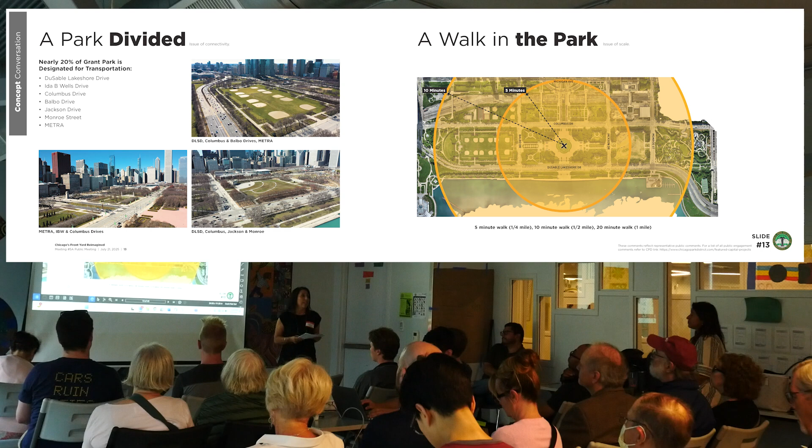We also heard that as a big park, it is hard to get around, especially because it is difficult to cross intersections when there's a lot of traffic.

Although the diagram shows a 5-minute walk in the smaller circle and a 10-minute walk in the larger circle, the reality is when you're walking along the sidewalk, crossing the street, crossing multiple lanes, it takes a lot longer than 5 or 10 minutes to traverse the park. So it is a lot to ask for people to come from north to south. It is a long way.

We also understand that there's conflict between traffic and pedestrians. So aligned with CDOT's Vision Zero, we are interested in having zero conflicts between traffic and people. Maria, these are the root issues that ended up being at the heart of many of our proposals addressing connectivity and scale, and how to facilitate pleasurable movement throughout the park. Dom and I will be taking turns presenting the ideas to you. Thank you, Dom, for jumping in.

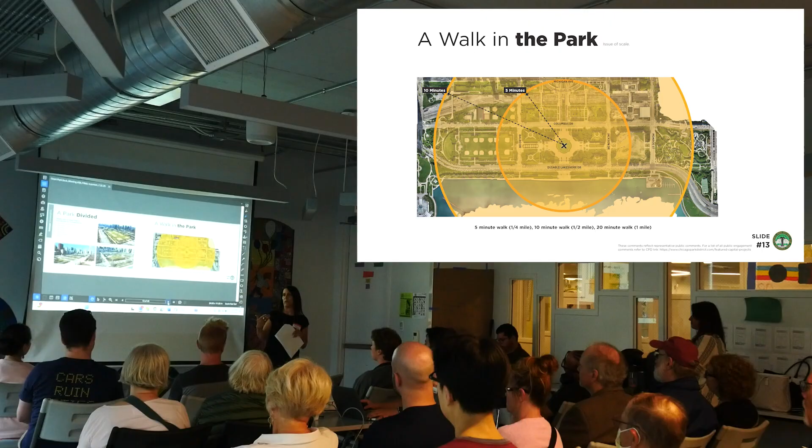The input that we gathered from you helped us develop 2 ideas, 2 concepts. You'll see them here on the left: stitching and bridging, and ultimately the thought of combined solutions between stitching and bridging. I'll tell you what those concepts really mean.

Stitching recognizes the divided park by transportation and accepts it, determines okay, there's going to be traffic and streets in the park, how do we make those better? Is there a way to narrow lanes? Is there a road diet solution to help minimize the traffic lanes or slow down the traffic? So stitching is about recognizing what's there and improving it.

Bridging is about going beyond that and separating people from traffic as much as possible. So whether it's having pedestrians go above traffic, having cars go below pedestrians, or some other way, we are looking for ways to physically separate pedestrians and traffic, which is one of the biggest concerns we've heard over the years of engagement. Ultimately, we think the solution would be somewhere in between. Some areas will benefit from the stitching concept and some from the bridging concept. You'll see comments or ideas for both of those concepts through this presentation today.

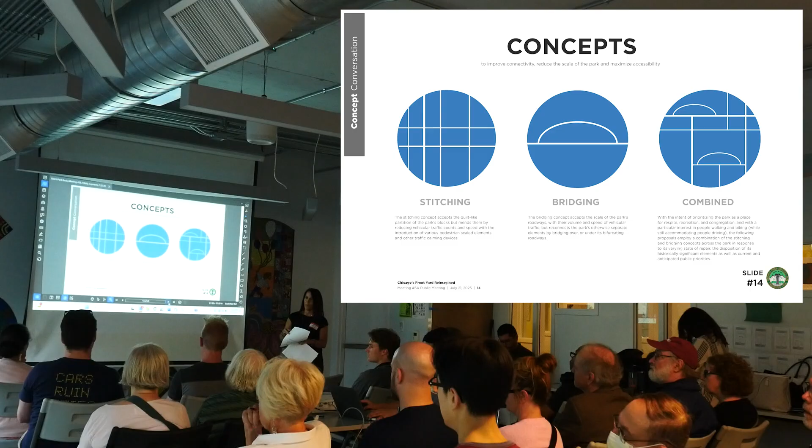As mentioned, this is a really large park, 300 plus acres. So in order for us to organize this presentation and talk through the ideas in a logical way, we have divided the park into 5 sections, like 5 chapters of this presentation. The first chapter is the Parkwide Elements, elements that will happen throughout the park. They're not specific to any area, but they affect the entire park.

Most of them are related to transportation, whether it's road diets, water taxi access, METRA lines, or what to do with Columbus Drive, how to make that a better street.

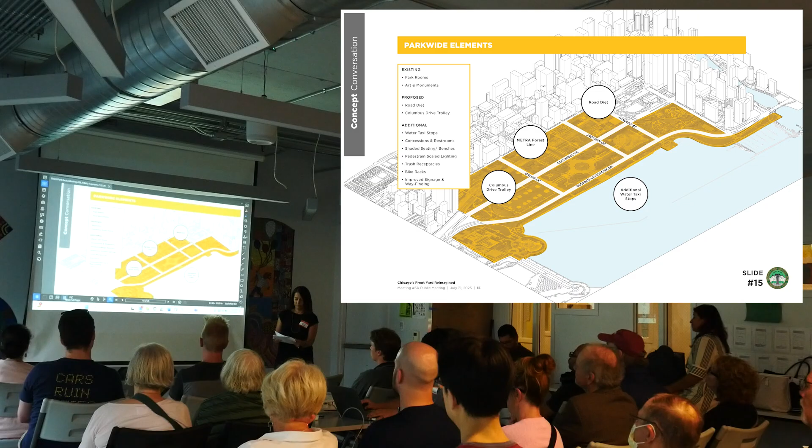Starting with DuSable Lakeshore Drive, one of the most important prominent roads on the park. The stitching concept proposes improvements to DuSable Lakeshore Drive. In this proposal, we are not reducing the number of lanes, but we are proposing to narrow the lanes in order to make room for a planter area, which is an area of refuge for people that are crossing 10 lanes. It provides a little bit of relief from crossing, running across, so they can stop here.

It also proposes that the planters that are there now be raised in order to provide a better separation between traffic and the sidewalk. It feels a lot more comfortable to have an actual physical barrier between you and traffic, and it also provides places for sitting along the area. So starting from the left to the right...

On this slide you see we are proposing tree-lined streets throughout, improvements with lighting on the lane side. The planter in the middle separates the lane and provides protection for a pedestrian, as well as banners and better lighting for the street. Then the same on the other side, with opportunity for sitting and benches.

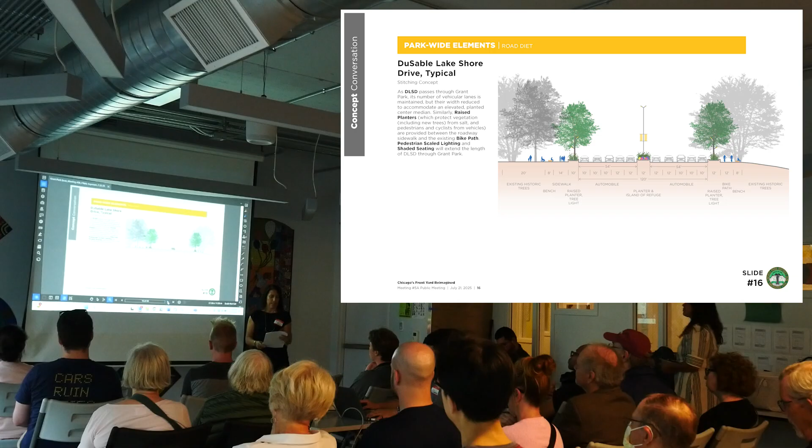Next, these two other important streets—this is Columbus Drive that runs right in the middle of the park. In this case, what we are proposing is the same tree-lined streets and same opportunity for sitting, but we are proposing a dedicated bike lane on both sides of Columbus, and an area for loading and unloading of a dedicated bus or trolley that moves people north to south in the park, so that long distance is much easier to traverse, especially in winter and on hot days like today, where people have access north and south with a trolley or bus dedicated to that.

And then, the bus will run from Navy Pier to Museum Campus, with lanes in between.

In this case, Columbus Drive does not have an island in the middle because we're also proposing for Columbus to be a flex street, meaning that for certain occasions you can close traffic, and it can serve almost as a plaza or event space, as it functions today. Perhaps there's a different kind of pavement that delineates the fact that it's more than a street, it's also a place for people.

The other thing is introducing parking. So parallel parking, most of this section here is parking. There are bulb-outs at the intersections to facilitate crossing the streets, and there are also little islands to service trolley stops, which might also function as bus stops.

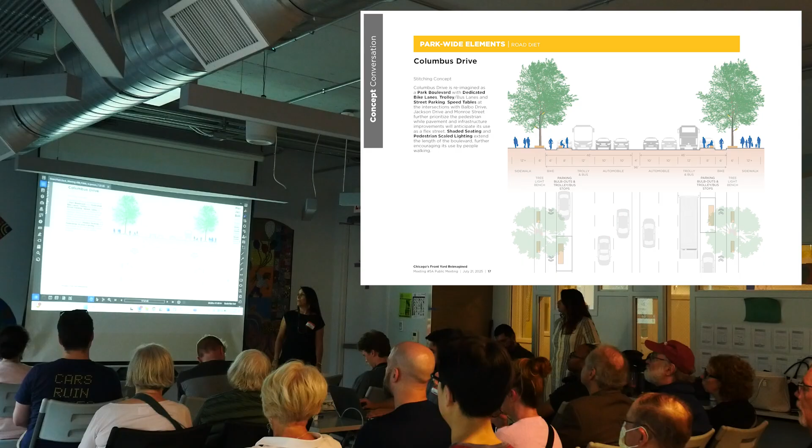You said there was parking? That's new parking on Columbus Drive? Yes, it's always had parking on Columbus Drive right now, but this would be new parallel parking. It's not new north of the fountain, but it's new south of the fountain — it used to be there before, so it's new in the sense that we re-established it. This is underneath the park.

Oh yeah, is that going to be like that for like 100 years?

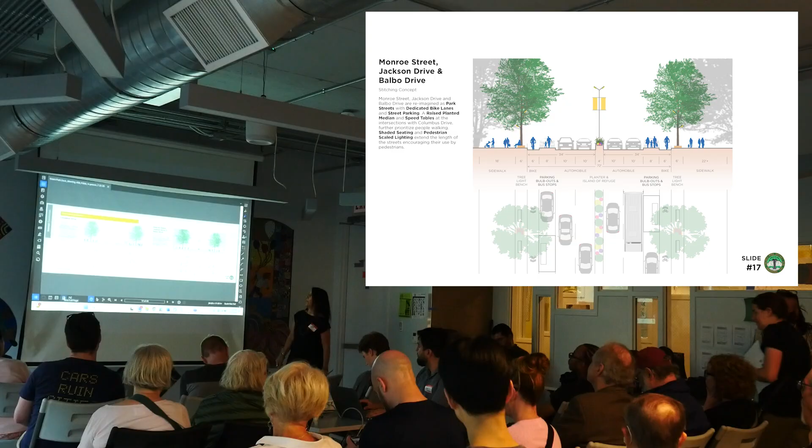In some areas, we're also proposing speed tables at these streets — Monroe, Jackson, and Balbo. There's a lot of mid-block crossing that happens because it's convenient to cross in the middle of the block, so we're finding solutions to prioritize the pedestrian at those locations and help eliminate conflicts between traffic and people. The speed tables could happen at every intersection, and at Balbo and Jackson the thought was to reinforce primary axes, since right now you can't go continuously — you always have to move to the perimeter and then back to the center.

I have a question — is this a park project or a car infrastructure project? It's a park project. Okay, this sounds like a car project. There happens to be streets in the park.

So we're starting with the park-wide elements, which includes all of the streets in the park, then we're moving further into the park. Much of this is part of that mending strategy, and at the root, these elements run throughout the park. Bigger moves will modify these to some extent and override them.

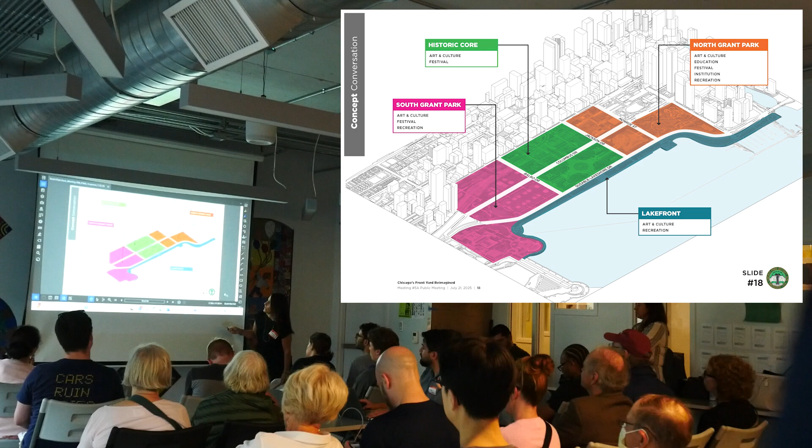As I explained, because the park is so large, we've organized this presentation into five areas. We've already talked about park-wide elements. The rest of the sections are depicted here by color. We'll start with the historic core in the middle, between Balbo and Jackson, then move south to the south end of Grant Park in pink, then the orange, which is the north end of Grant Park, and finish with the lakefront, which is the ribbon or line that connects north to south.

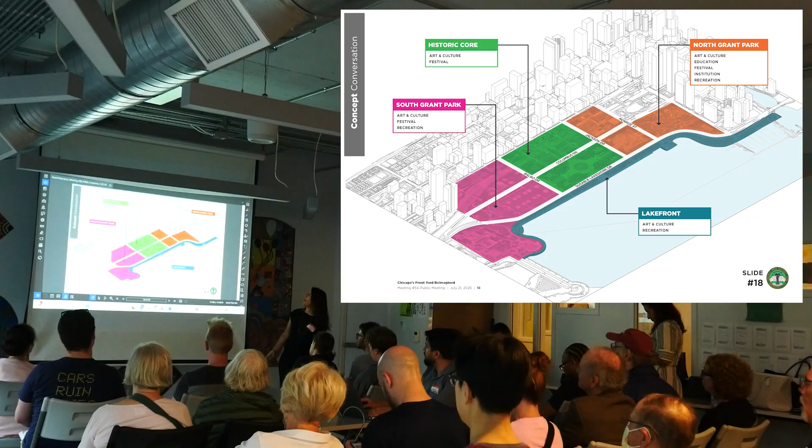The historic core is the park at its most formal and includes Buckingham Fountain, the adjacent spoke rooms, and rose gardens. Across Columbus Drive are the presidential courts, and then Congress Plaza adjacent to Michigan Avenue. These are separated from one another by Ida B. Wells Drive and the Metra tracks. Proposals here include the restoration of Congress Plaza, conversion of Ida B. Wells to a flex street, and the provision of a direct pedestrian connection from Buckingham Fountain to Lake Michigan.

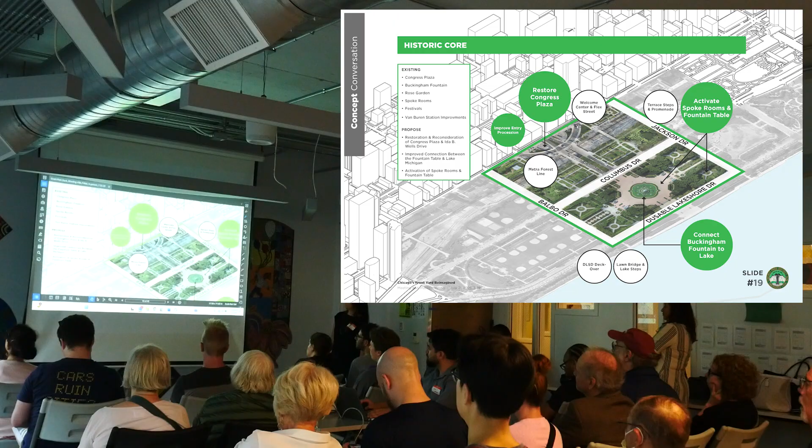Congress Plaza is currently separated by Ida B. Wells, a 6-lane roadway which prioritizes people driving at speeds of 30 miles per hour or more, through and not necessarily to the park. The presence of trees, pedestrian-scaled elements, and wayfinding are few here.

In response to concerns we heard regarding connectivity and scale, accessibility and friendliness to people walking and biking, the Welcome Center and Flex Street concept proposes converting Ida B. Wells back to a flex street to calm motorized traffic and make it more user-friendly to people walking and biking in the park. The flex street would eliminate curbs and lane markers, and in their place provide other cues such as bollards, planters, and paving patterns for directing motorized traffic.

Trees for shaded walking and seating, art installations, and wayfinding would further people's enjoyment of this primary entrance to the park. It is understood that some people who simply use the drive to access destinations beyond the park will look for alternative routes to bypass.

And we should mention that Congress Plaza Drive remains as a connected street for access for buses, etc. Drop off, bus function, yes. Here also a welcome center with an attendant. Current park information updated daily and restrooms is proposed to further activate the space and welcome people to the park.

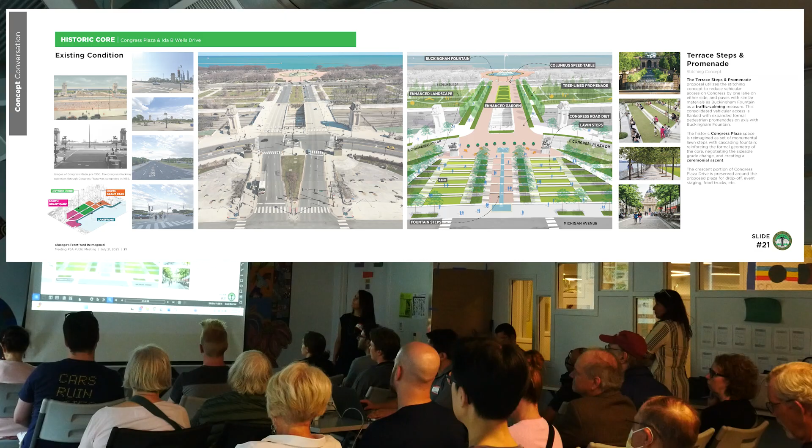In this proposal, Congress Plaza would be wholly dedicated to pedestrians, with the introduction of a fountain complementary to Buckingham Fountain, and a series of lawn terraces or steps with additional trees to walk people to Grant Park from Michigan Avenue and provide another convenient place of respite immediately adjacent to the loop.

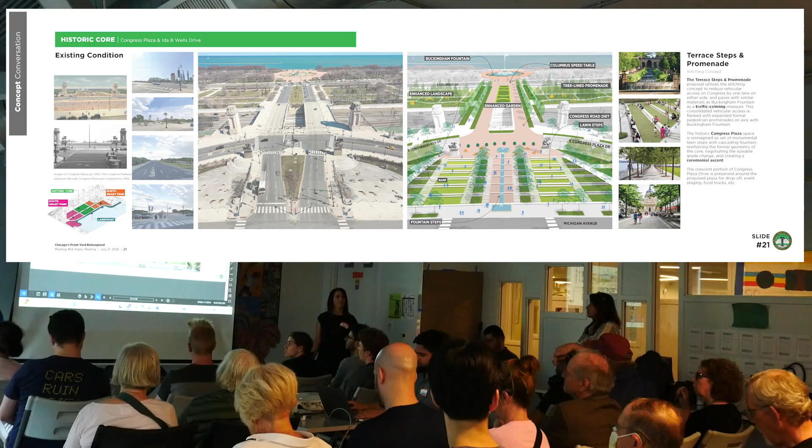These are just ideas, side by side. Option A and option B, and we welcome your inputs. Option A on the left and option B on the right. And that's what the boards show towards the back and what the dots are for.

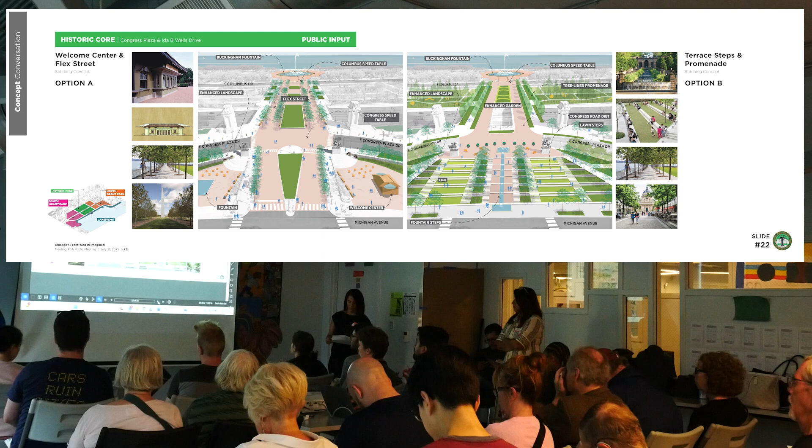Moving on. DLSD Deck-Over. This is between Buckingham Fountain and Queens Landing. The fountain and Queens Landing are currently separated by DuSable Lakeshore Drive, now an 8-lane expressway which prioritizes people driving at speeds of 40 miles per hour and much more through the park.

Originally conceived in the late 19th century as a boulevard for pleasure driving, this now egregious interruption of people's natural desire to move freely between the park and the lake, particularly at this central location, has been a design and safety concern since the emergence of the outer drive along the lakefront in the early 20th century.

In response to this, the concerns we heard regarding connectivity and accessibility and friendliness to people walking, the DLSD Deck-Over proposes a depression of Lakeshore Drive between Balbo and Jackson Drives.

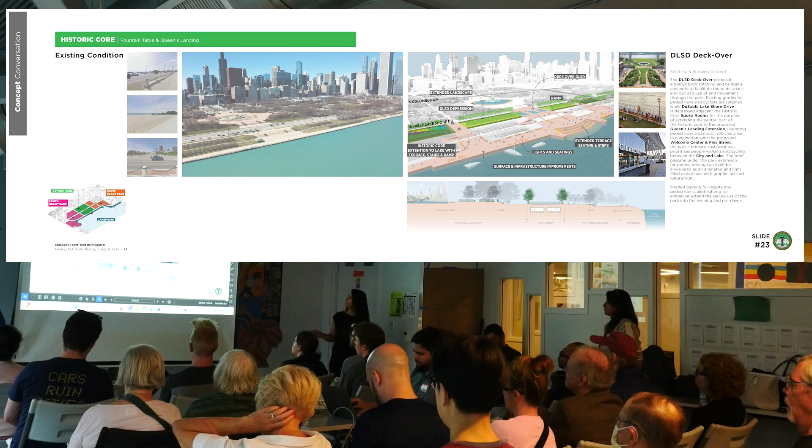In place of an expressway, park visitors would be provided with lawn panels for recreation and trees for shaded seating. New pavers to match those of the fountain and new ramps to ensure accessibility would complement the existing stairs and provide uninterrupted pedestrian passage between the fountain and lake.

It is understood that there are some technical challenges to this, which we will be able to address. So you're going to talk about that, where the cars can go to. Where will they go, veer off?

So they don't veer off. They actually go down, starting at Balbo or Jackson. They start to move down, and by the time they get to the extent of the spoke rooms, they'll be low enough to then pass under an extension of the park. So in this proposal, the park itself maintains the current grades, but eliminates the traffic, pushes it below the park. And so the whole park extends from Balbo and Jackson, or excuse me, the depression starts from Balbo and Jackson, but the park extends just north and south of those areas.

So are those bridges? Effectively, this is a continuous bridge. But the thought is that when we look at another scheme that is actually a bridge, the idea here, and the reason we call it a deck-over, is it's really the park continuous for the extent of the fountain. Only at the periphery would one be able to, and even these would be provided with a barrier to the traffic, sound and vision. So the thought is that this really becomes separated from the traffic of the DLSD.

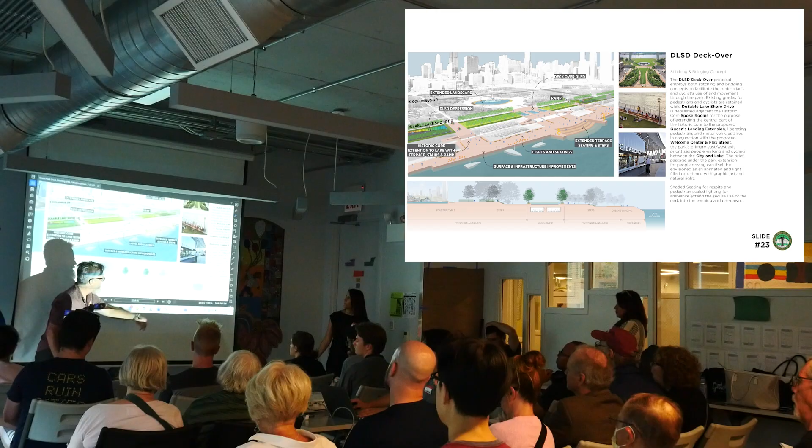So this is a little closer section. The fountain is on our left, the lake is on our right. What you're seeing in the background would be a barrier where the deck-over ends, and if that wasn't there, you could look down at the traffic. But here, we're proposing limiting the extent of your vision and hopefully mitigating the sound that would come from that drive. Where's the water table? We'll have to waterproof.

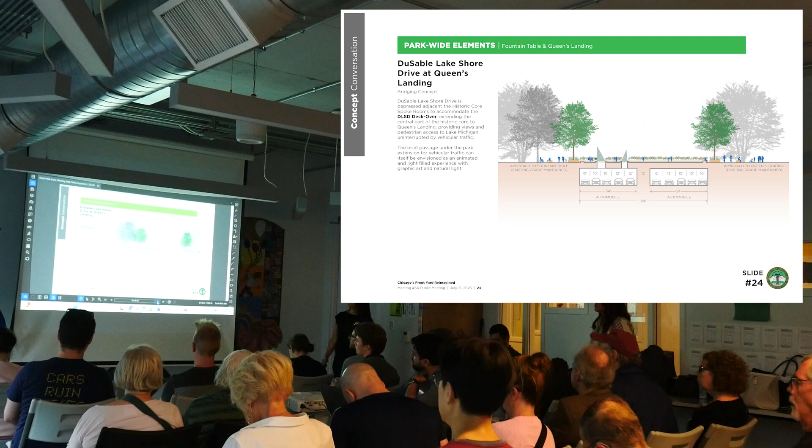Drivers still have access to Jackson. No efforts made to permit the access. Not in this - that's for the road guys that we're looking at earlier. So we would look to improve those crossings, but not eliminate those roads.

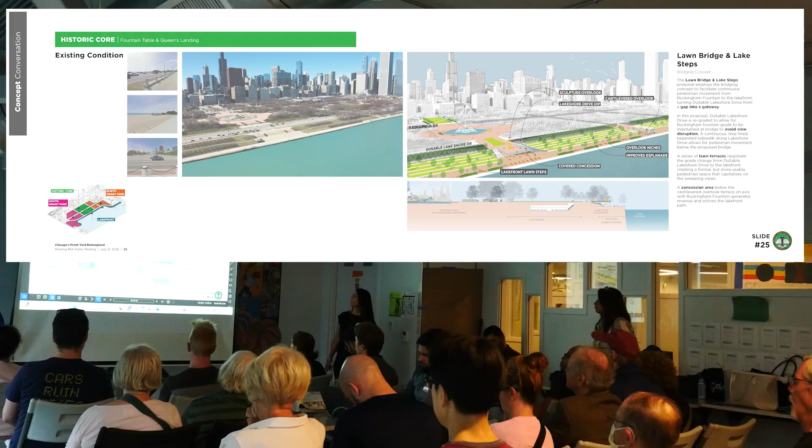So this is what I was alluding to earlier. It's really more like - so we call this the lawn bridge and lake steps. It's an alternative proposal which would also provide uninterrupted passage for people walking between the fountain and the lake while maintaining the continuity of the lake on the bike path.

So I should mention that both of these maintain that at grade in both cases. The difference here is that this, you can see, is much narrower, so it doesn't take as much space, and it also stays at the height of the fountain table, it doesn't step down. So it extends completely across the drive. Once east of the drive, then we would provide new steps and ramps to get down. We end up with this terrace here, which is well above Queen's Landing, under which we could tuck concessions and restaurants and such.

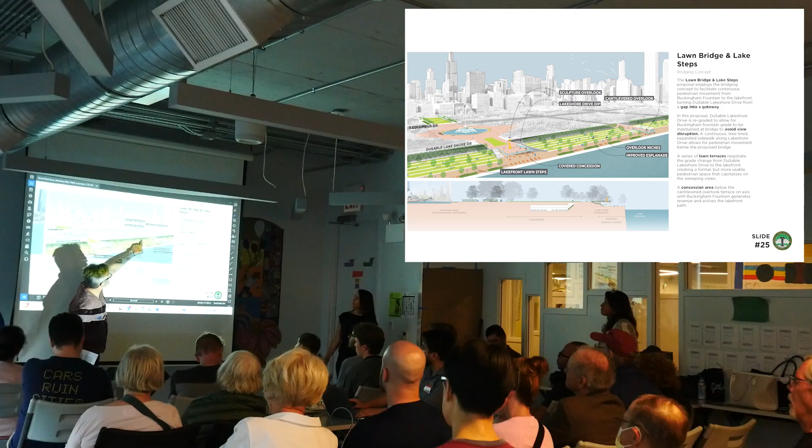Is that another bridge? This is - it's not a, yes, excuse me, no, this is an elevated platform, a terrace to terminate Jackson, but at this point, we're looking at it as a speed table. So we don't actually start to move down until you get past that. So the depression of the cars really happens just at the bridge. It starts prior, but it doesn't have to start quite as well.

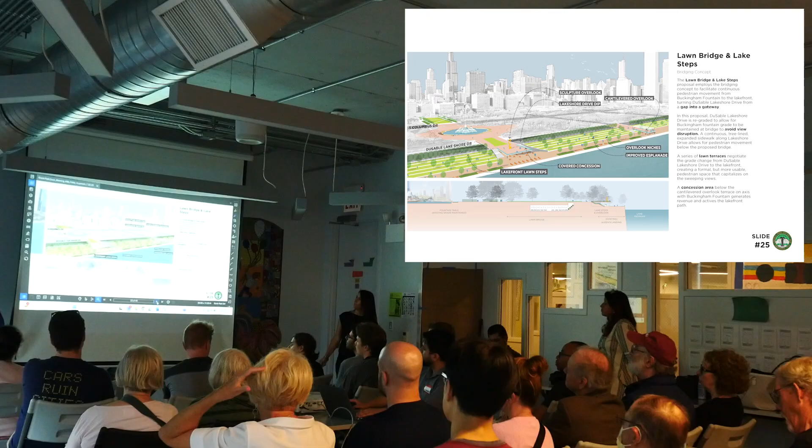So, cantilever? It's not actually a cantilever, but yeah, effectively the idea is that it's relatively open underneath. And the cars are still in the same location, just a little bit lower.

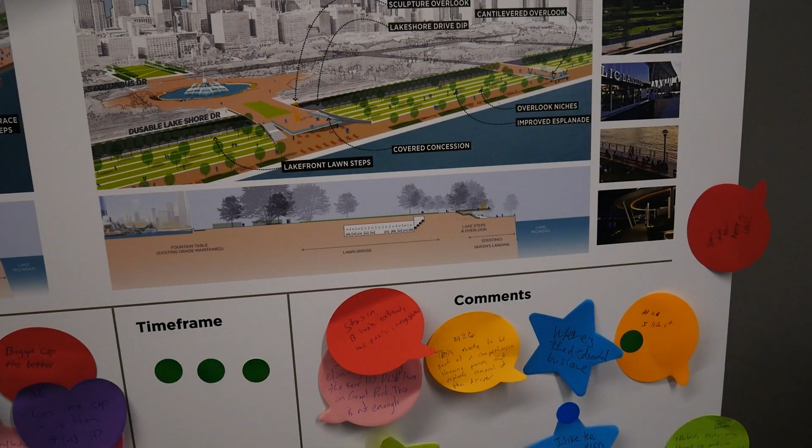One of the things to mention is that those options that depress the traffic below either the decking or the bridge eliminate one traffic stop for the vehicles that are just trying to get through the park. And some of us enjoy, when we are motorists in the park, coming and going through the park - it's fantastic. So all of these, to some extent, are compromises. And in this brief moment for motorists, it doesn't have to be a dark, dank tunnel.

We can animate that space with color and natural light. So as we continue these conceptual conversations, again, please use your Post-it notes, and let's continue to let the design evolve with your input.

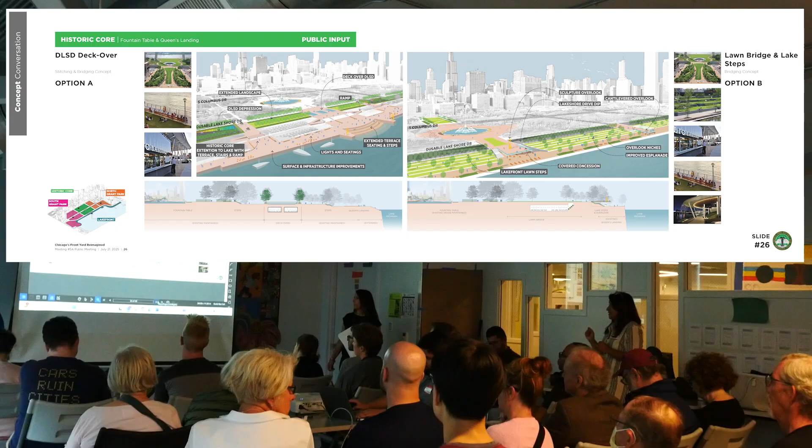So we have option A, the Deck-Over, and option B, the bridge and lake steps. Slide number 26, speed it up. This one, 27? Spoke rooms and fountain table.

I'm sure we all know where those are, we're not in the picture for you here. These are just some images to suggest how the space might be animated. The spoke rooms, which surround Buckingham Fountain and the fountain table itself, are relatively underutilized in the absence of organized events. This is understood to be a function of the park's issues of connectivity and scale, to be addressed with the various proposals throughout the plan update.

In response to specific requests to activate and make these spaces more interesting, and thereby more popular and secure, shaded seating in the form of cafe tables, and even lounge-type seating, movable, could be provided to encourage congregating.

We're also thinking art could be a big piece, rotating, to keep these spaces fresh and interesting. These ideas are relatively temporary. They do not affect the historic aspect of this historic core at Grant Park, but it activates and provides spaces for people to get to, sit, and enjoy.

Got it, alright, so we're moving on to South Grant Park next. This is the pink area, south of Balbo.

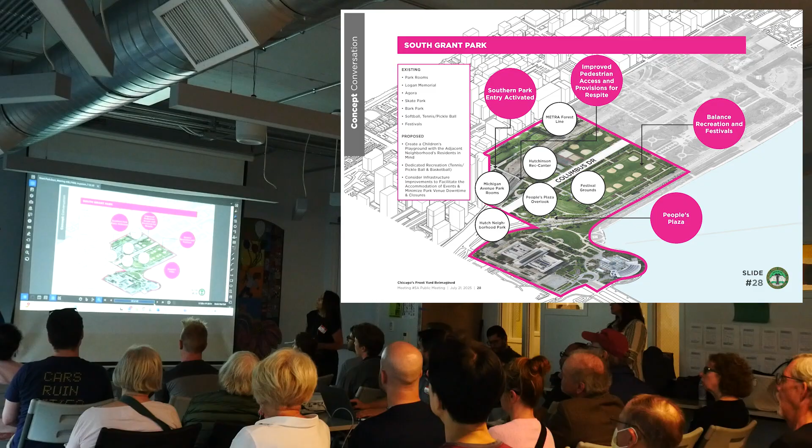We'll move on from there. The existing conditions are to the left, and just to orient you, there's the softball fields to the north, this is Upper Hutch.

Correct, okay thank you. So what we heard was, consider reducing the number of softball fields to accommodate other sports. We heard about improvements to the roads, and for pedestrian connections, the need for comfort facilities, particularly around the pickleball courts, and then spaces for families needed on the south end of the park.

So what we propose here is a consolidated area for the softball fields, a new pedestrian connection here at 8th Street with potentially basketball courts, or it could be another sport. The idea is that we mix up the opportunity for sports here.

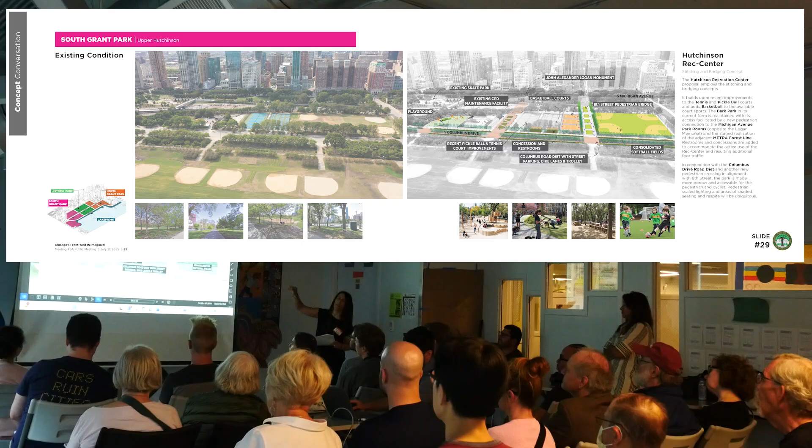So this is one option. We'll show you another idea, which is slide 29.

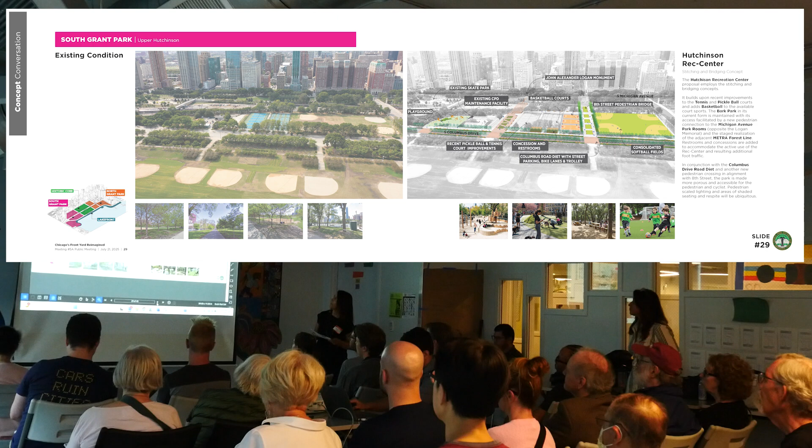Here we see, this is an old picture, yeah. Here's the maintenance facility, here's the dog park, the METRA lines that run north and south, and then back here is the skate park and the Agora section.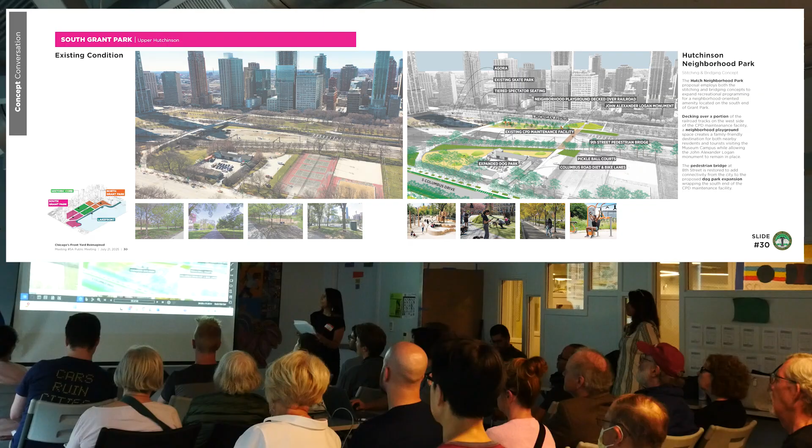We heard the same comments about this area, we're just proposing slightly different ideas. So here, what we propose is a new pedestrian connection at 9th Street, to get people east and west across the park. Road diets again on Columbus, to the south. New tiered seating at the 11th Street pedestrian bridge, which is here.

There's lots of attention on the skate park, and every time you walk by there, people are standing and looking over.

So it provides an excellent opportunity for tier seating and allows for that to be a destination in the park. We have a new community park now, decked over the METRA line. Where the lines intersect, this is a proposal for a deck to provide the south community with a big family park. That also allows us to expand the dog park, larger, probably twice as big, around the maintenance facility.

And what's the cross street to that? I see Columbus, but I'm just trying to orient myself. Yeah, this is 11th. And what's 9th? So that would be a new connection at 9th. 9th and 11th, thank you.

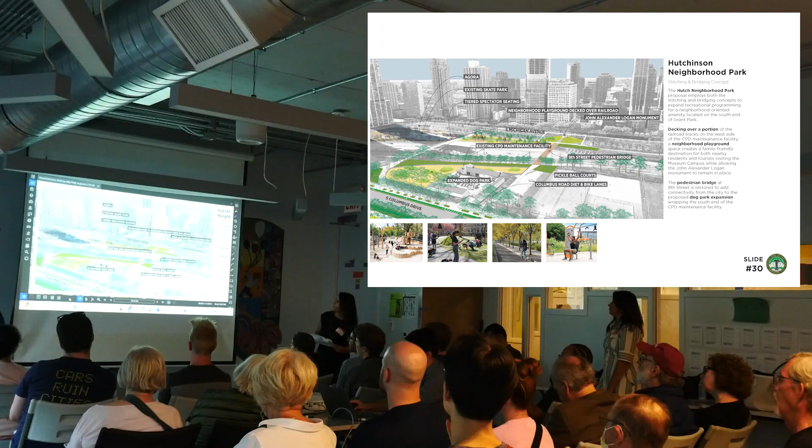And if you zoom out, this is slide 30. We'd love to hear your thoughts on both of these similar area ideas. Option A is slide 29, option B is slide 30, and we're going to continue our conversations and concepts with your input.

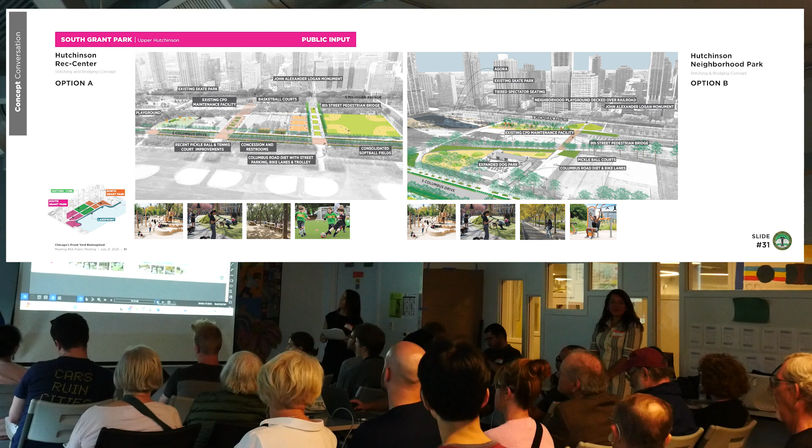Okay, so this is now the lower Hutch. Just to orient you, you see here the softball fields, festival grounds essentially, DuSable Lakeshore Drive to the left. What we heard about this area is that there was interest in having traffic calming measures surrounding the roadways, and that it's unfortunate that whenever there's a festival, it takes a very long time for the field to heal before people can use it, so producing solutions for that.

We heard that it's also difficult for people playing sports to access, with baseball or softball bats, etc. So access to sports and access to staging for events was something we were asked to address, along with accessibility, ramps, and improved pedestrian connections.

So our proposal on the right maintains this as a large area for large gatherings. This is where currently Sueños and Lollapalooza happen. Understanding that this is still the largest place in Grant Park for people to gather, we propose to improve access all around for both sports and festivals, with ramping that allows access to a terrace on this end.

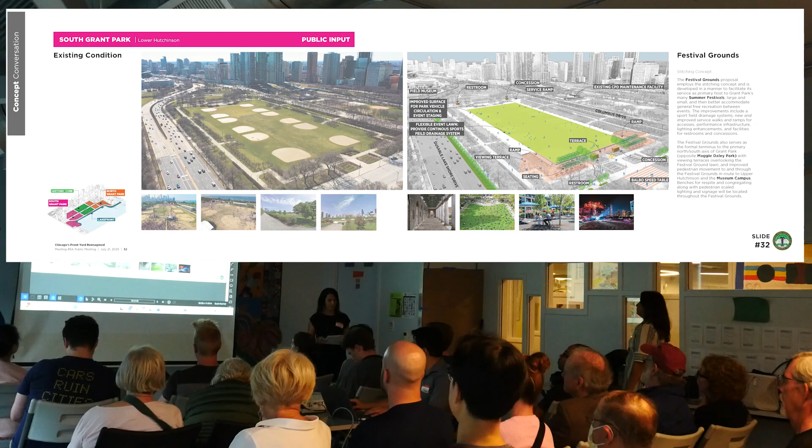And restrooms. Yes. Okay, we are now moving west along Roosevelt to Michigan Avenue. Just to orient you, this is Michigan Avenue south here, and Roosevelt runs east to west. This is the southwest corner of the park, the southwest entry to the park. This is where the Agora sculpture is and has been located since 2006. You can also see here the skate park and the Metra lines running north to south.

The comments we heard from this area were general interest in improving the Michigan Avenue rooms and having those be better defined as destinations, potential places for people to gather, tailored to what's happening around the neighborhood. There was a desire for a better defined and more engaging south entry to the park, and a need for community play space on this side of the park, like what Maggie Daley does for the north end of the park.

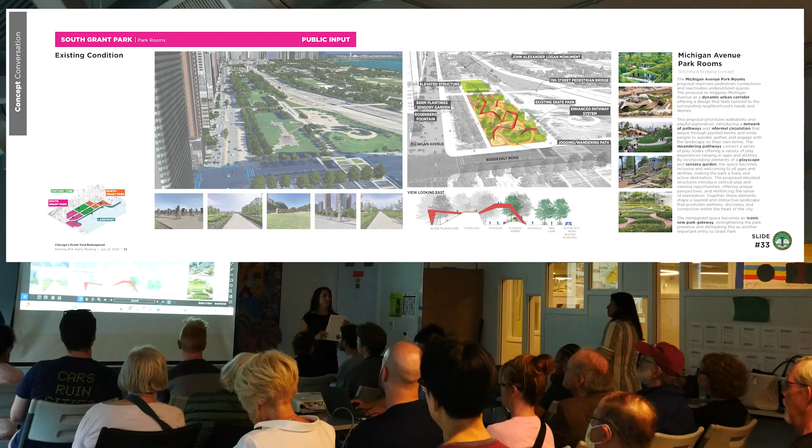And better pedestrian access around. So what we propose here is a new park at this location that becomes the new gateway for the south neighbors into Grant Park. It would provide mounding, areas for planting, gardens, play nodes and exploration, accommodating anybody with any age, any ability. The idea too is that perhaps there's a way to allow people to see from different viewpoints, maybe bridges or some fun exploration in this area. It's a place for families and for gathering, identifying this south entry as a new iconic park for the south neighbors.

And this is slide 33. So your thoughts on the idea of the south gateway would be great.

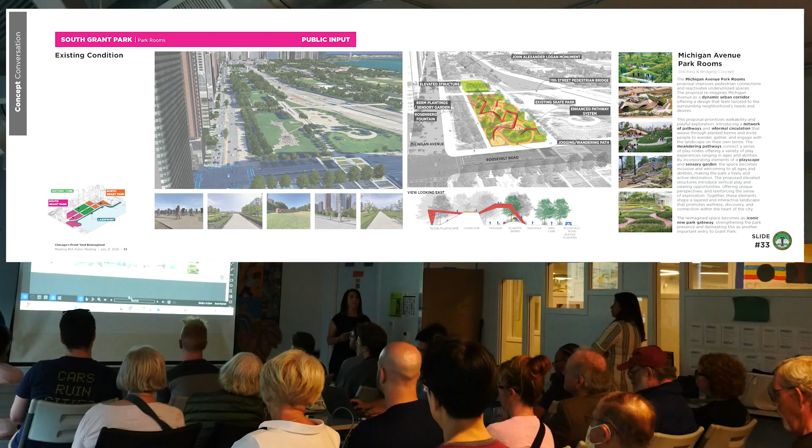And I think lastly for this area is the Columbus area, so the Columbus statue area. The current conditions are here. This is a really well planted and landscaped area with beautiful grown trees. It is a high point on the park, also surrounded by high traffic on all three sides. It has easy access for those going to the museum campus and Soldier Field, so providing better connectivity is something that we heard.

We also heard that there was a desire for this area to contain a more culturally inclusive element in the park. So what we are proposing here is to maintain that plane. It is very usable, very high, and has a lot of potential, so we would assume the personality of this park would be more of an arts park. With interpretive installations, we would want to improve access for pedestrians and those with mobility concerns, and allow for areas of respite or terraces along the way where the park could showcase part of their art collection.

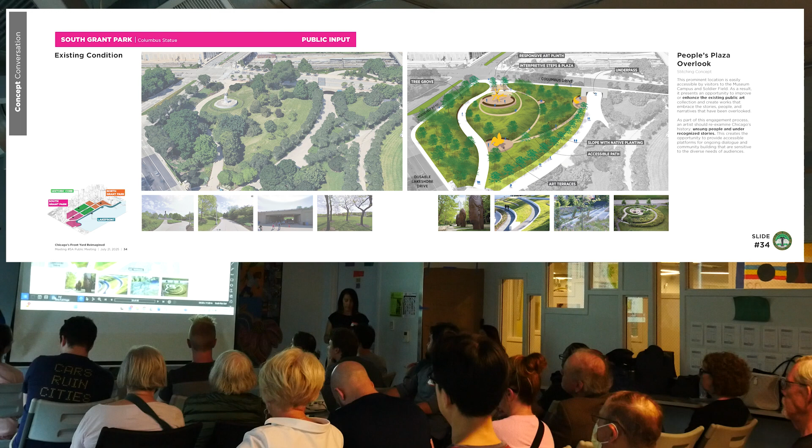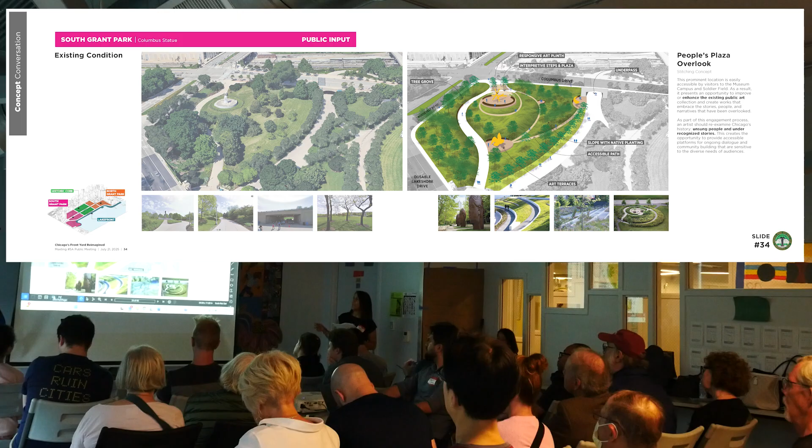So it would be our interest, or what we heard from the community, that there's opportunity to enhance and showcase the park district's collection with pieces that embrace the stories, the people, and the narratives of communities that have been overlooked. This could be a really beautiful destination, again on the way to the park, to the museum, maintaining the tree grove and all the natural areas that are there now.

North Grant Park is home to the Art Institute and the School of the Art Institute of Chicago. It is also home to the iconic, outdated, and therefore underutilized Petrillo Music Shell. To the north, adjacent to the beloved Cancer Survivors Garden and a short walk from Peanut Park with its recently rejuvenated tennis and pickleball courts, is Maggie Daley Park, the northern terminus of Grant Park and one of its most popular destinations.

Proposals in North Grant Park include the reconsideration of Butler Fields to facilitate connection between these iconic elements, while also accommodating the ball fields that would be displaced by Lower Hutchinson's under consideration as a park festival grounds. A new pedestrian bridge is proposed over DLSD's S-curve to connect North Grant Park to the Lakefront.

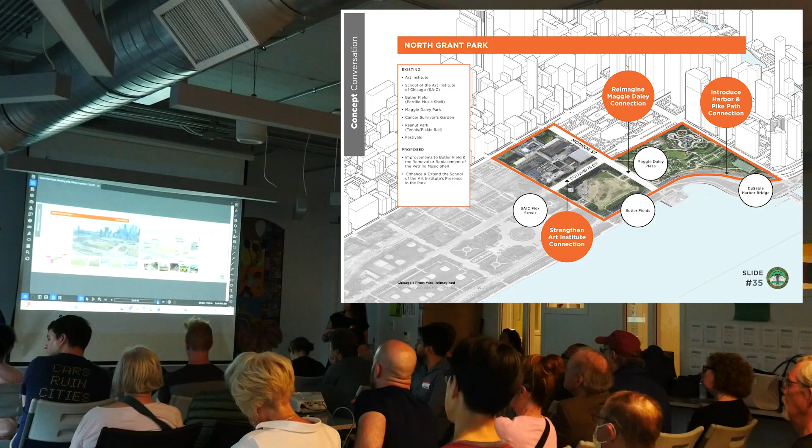Butler Fields: the Petrillo Music Shell, through a combination of disrepair and aging infrastructure, no longer attracts musicians or accommodates public events, and has become an impediment to active use of the public field. In response to requests to replace the music shell, provide more visibility for the Art Institute, connection and view to the lake, and make Maggie Daley Park more integral to Grant Park, the Butler Fields proposal levels the lawn panel and provides playing fields with viewing terraces at each corner of the park.

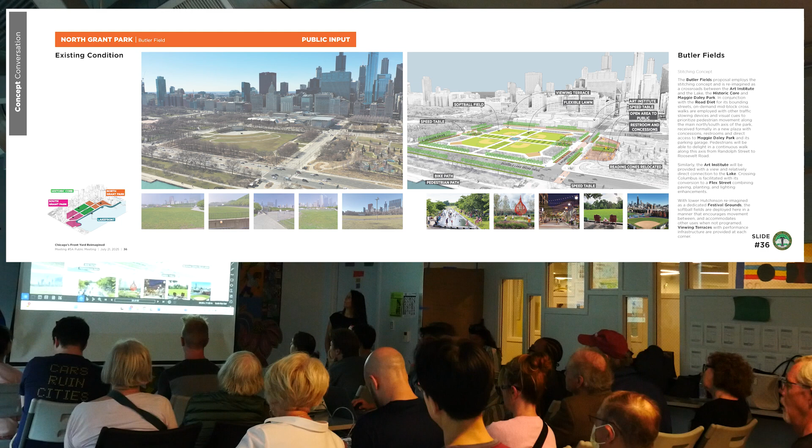That could include infrastructure for use as performance and exposition venues when not intended for sport. A formal north-south pedestrian promenade, in conjunction with the mid-block Monroe Drive speed table, would connect the historic core to Maggie Daley Park. The former Butler facility at its southern extent could be developed as a plaza with restrooms and concessions and shaded seating, along with a stair and elevator for convenient access to Maggie Daley Park as well as the garage beneath it.

Sorry, Don, I tell you, we're running late.

An east-west pedestrian promenade, in conjunction with the Flex Street on Columbus Drive between Monroe and Jackson Drives, will connect the Art Institute with the school and the lake, and increase the school's visibility to the public.

So generally, this is all flat. These lawns are flexible, so this is intended to be wide open so it can be used as a single space as well as for community, and to provide views to the audience.

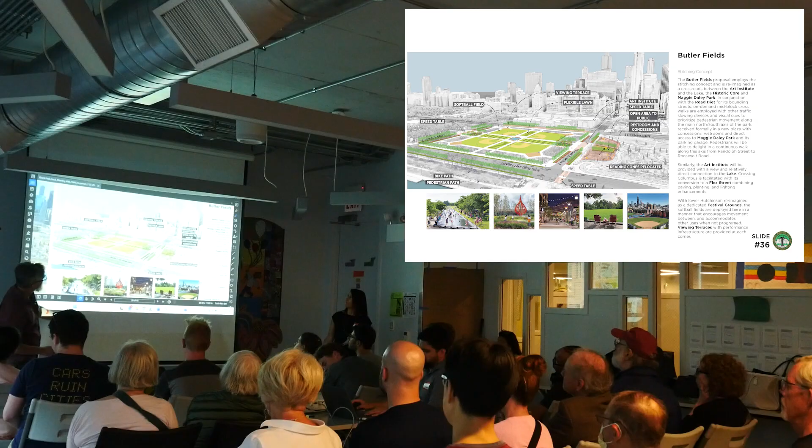What slide is this? Yeah, 36. Thank you. But the use of the Flex Street there, too, is to facilitate that connection to the Art Institute.

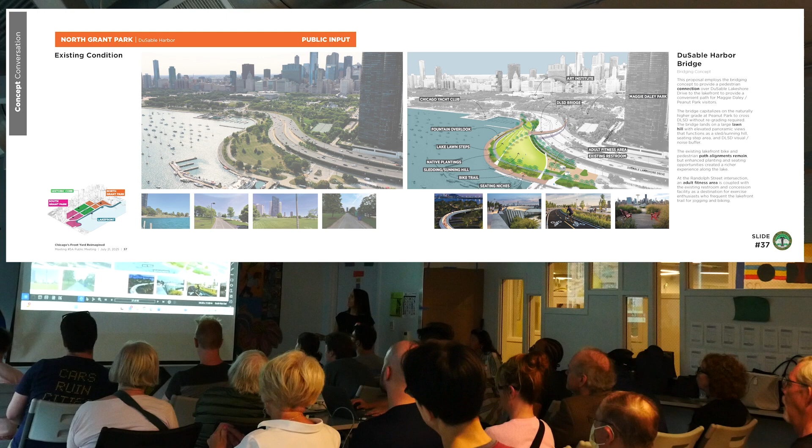Most Chicagoans, and certainly all users of DuSable Lakeshore Drive and Grant Park, are all too aware of the crowds that gather at the intimidating intersection of Lakeshore and Monroe Drives. Many may be equally unaware of the underutilized hill between DLSD and the lakefront pedestrian and bike paths, with its scattering of short trees providing neither shade nor the spectacular panorama of harbors and lakes which the hill could provide.

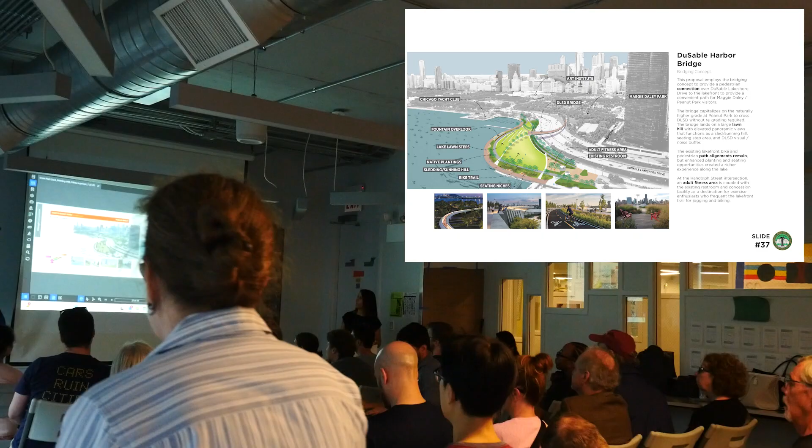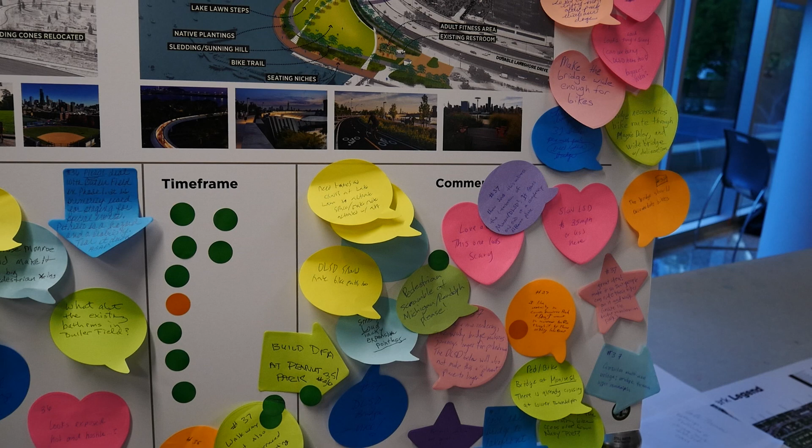All right, so we are moving on to the last section, and I'll go quick. This is the lakefront section of the park. What we heard is a desire for better activation of the lakefront trail, better destinations, and places for people to rest and visit.

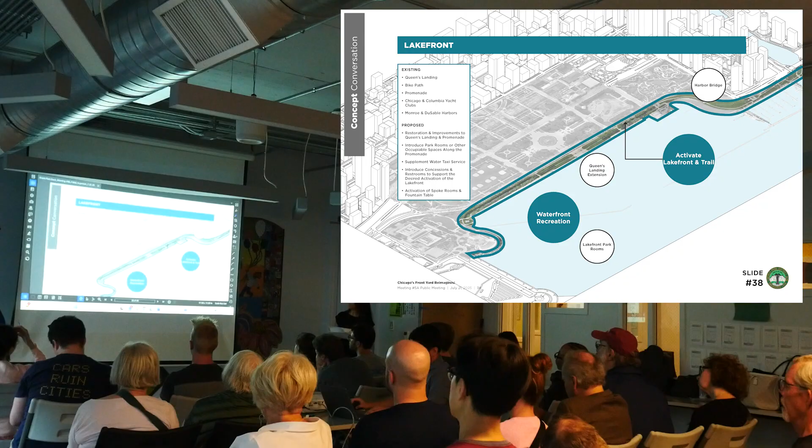So you'll recognize this diagram — this is Buckingham Fountain, just to orient you, and we're talking about this linear north-south connection that is the lakefront. This is Queen's Landing right in the middle. The existing conditions include a linear path, lots of landscaped green spaces, and of course the dividing line, which is DuSable Lakeshore Drive. What we heard is that people wanted to better connect between the park and the lakefront, have a much clearer connection to the water, that the Queen's Landing fountain was important to maintain and better define, better access and accessibility, installation of facilities and seating, and a desire to maintain the clear separation between bikes and pedestrian pathways.

So what we are proposing is, yes, to maintain those pathways — this is the case on two slides, this one and the next. But also to improve access via water, the same way we're proposing the trolley along Columbus inside the park. This would be water traffic or water taxi, taking people to other destinations along the water. A couple of spots with improved seating and access throughout, and the creation of a couple of terraces, possibly at the terminus of Jackson and Balbo, to provide a different vantage point and more activation along the length of the park, as well as better facilities and concessions throughout.

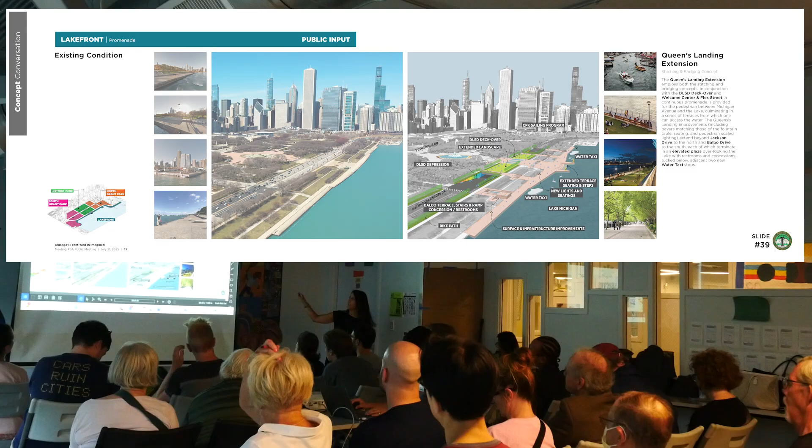So this is slide number 39, and the continuation is on the next slide, slide 40. On the left-hand side, we're talking about the south end of the lakeshore as it turns the corner. You might recognize the pavilion that is currently there. It's very inaccessible—in fact, I think it's fully limited to people. You'll see the bike or pedestrian lanes and the lawn angle versus the sloped lawn in that area.

What we heard is that people think this is a beautiful destination in the park. They really enjoy this location, but there's a lack of comfort stations and facilities, places to sit and rest, and a lack of definition for what happens north and south on this pathway.

So what we propose is that there are opportunities to stop, enjoy, and gather along this path, as well as just stroll—different options for gatherings, a lawn area, perhaps a play area. At the terminus, where the pavilion is located, that becomes a deck, a different material, a destination with places for people to sit. The lawn could also be stepped for different kinds of activities, giving better definition to what can happen in that area.

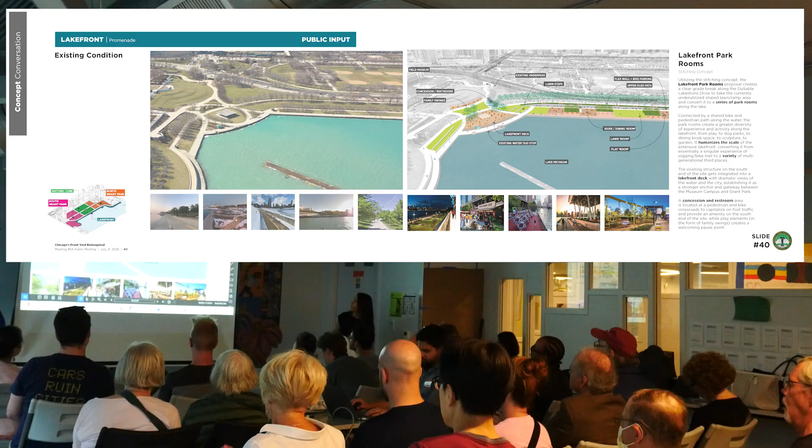So this is slide number 40, and I'm sorry we're rushing, but we're almost done—just a couple more slides. For as long as the park has existed, trains have had a conspicuous presence in it.

As their purpose and presence has diminished, so too has their imposition on the park—through the replacement of rail yards by parkland, and most recently at the turn of the century, the decking over of the rail trench just north of the park, between Monroe Drive and Randolph Street, to make way for Millennium Park.

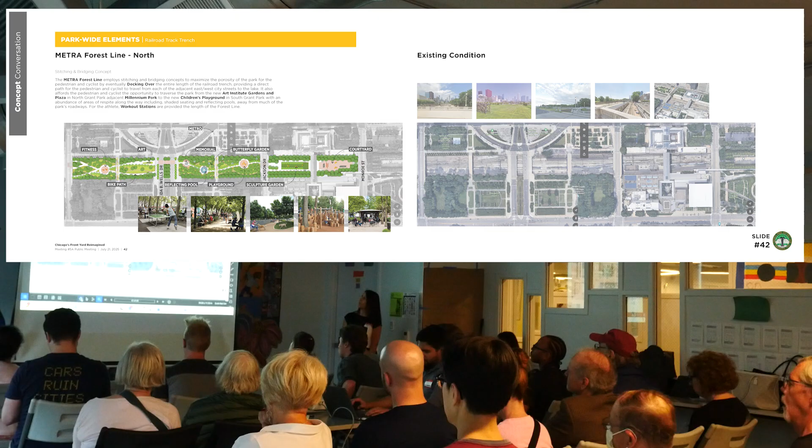Next slide. In response to requests for Grant Park to provide amenities like those Central Park affords its residents and visitors in New York City—with its naturalized landscape and resulting escape from the noise, busyness, and formality of the city—the METRA forest line, through an extensive and eventually complete decking over of the railroad trench, would afford such opportunities to Chicago's residents and visitors, with continuous tree canopy and meandering walking and bike paths.

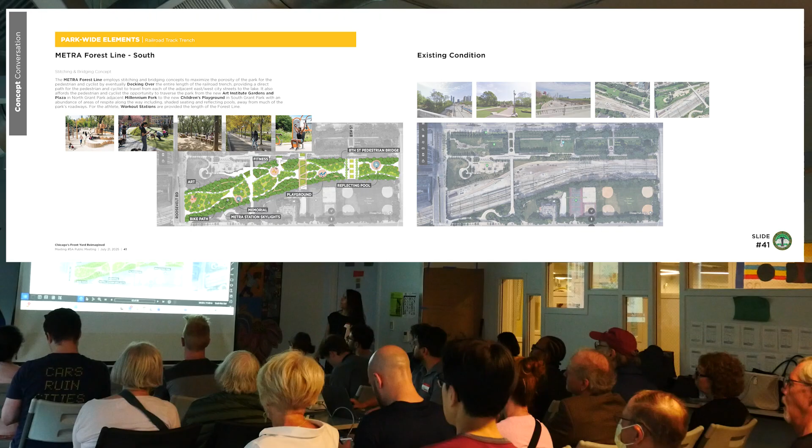Let's look at this in its totality. By linking directly to Millennium Park, people walking and biking could move relatively unimpeded and undistracted by motorized traffic between the northern and southern extents of the park, from Randolph Street to Roosevelt Road and back.

Along the way would be venues for exercise, recreation, respite, and contemplation in the form of workout stations, playgrounds, and reflecting pools. There's a sculpture garden and court adjacent to the Art Institute, serving as the welcoming connection to Millennium Park and the park.